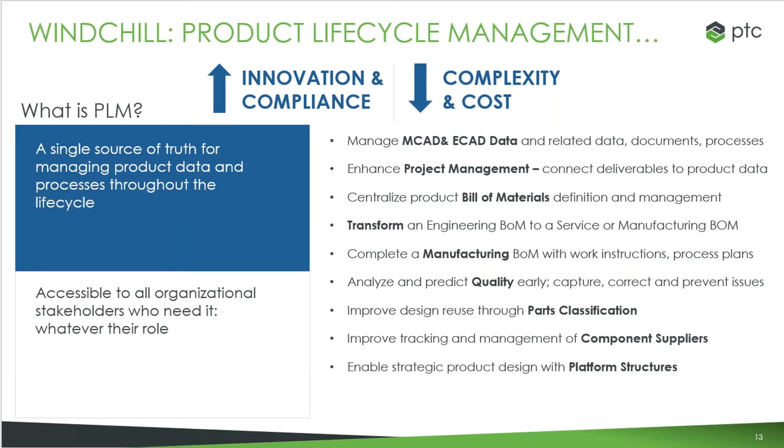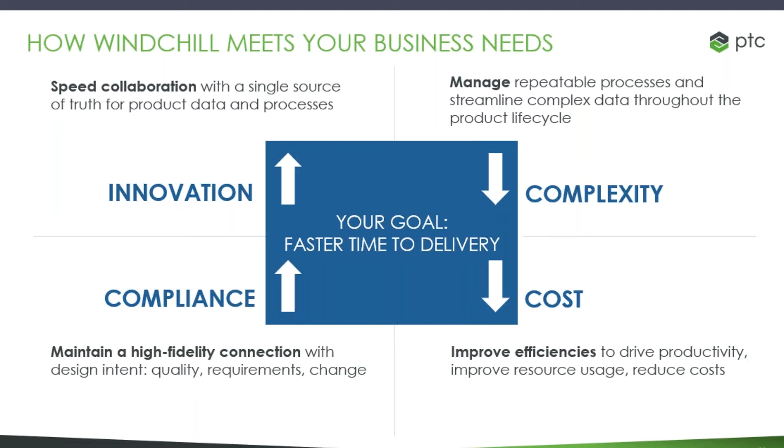Windchill is a single source of truth for product data and processes. It manages a repeatable process through the product lifecycle, maintains quality throughout the process, and drives productivity. So in this webinar, Cody will inform you of how SolidWorks can work with Windchill. It is all yours, Cody.

All right, thank you very much, and nice to be here with everyone. As mentioned, I'm going to be talking to you today about how PTC can help you work with SolidWorks data, whether that be from a CAD perspective or from a PLM perspective, and what we really offer there.

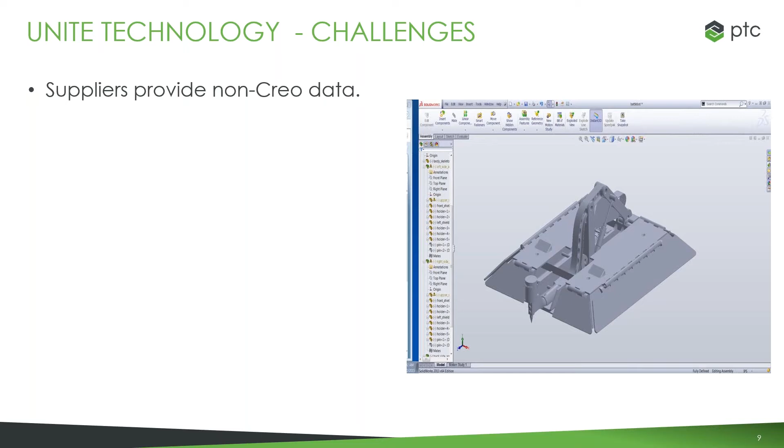Starting off from the CAD side, we have what's known as the Unite technology. The Unite technology is meant to help people, number one, by being able to give people non-Creo data. Sometimes suppliers provide non-Creo data and you need to be able to bring that in, and we want you to have ways to work with that.

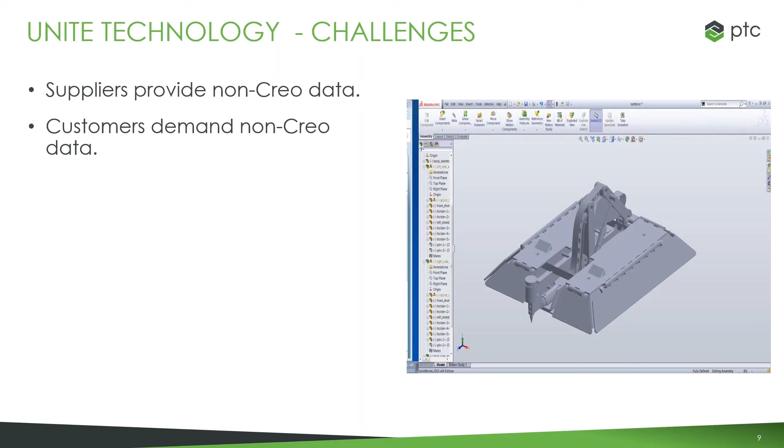On the other side, some customers need non-Creo data, and you need to be able to output in something that they can look at and be able to open and work with. As well as the fact that large corporations often have a hodgepodge of CAD and different tools to work with, and it can be difficult to go between those different tools. Traditionally, you can do outputs as neutral files and try to import things, but that does not always work perfectly.

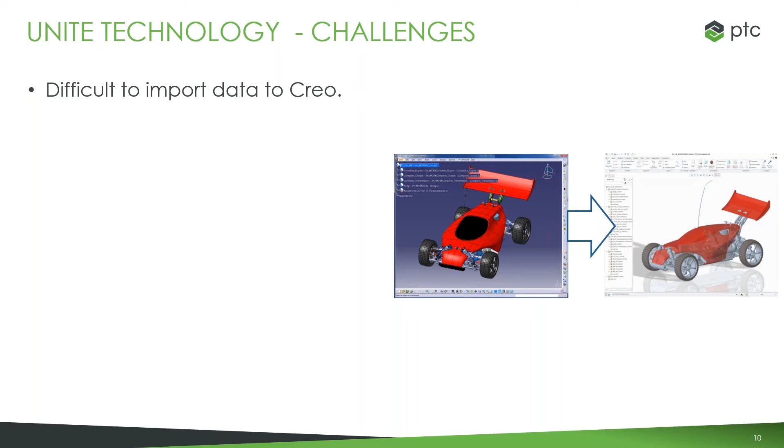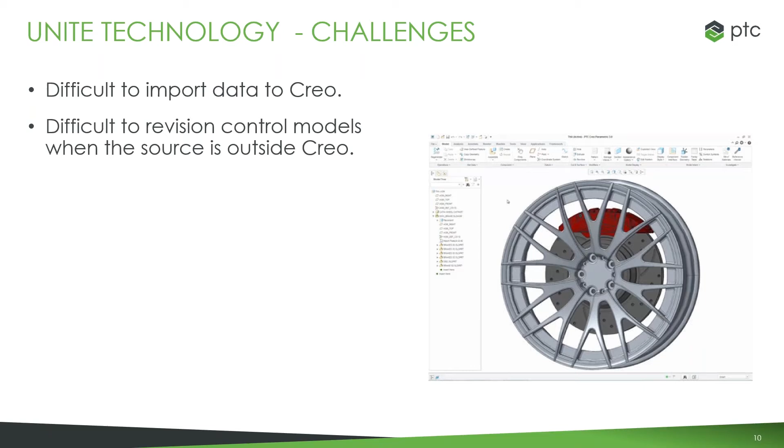There can be failures, or it can just be slow, especially if you're importing a large file. And then you have a difficult time keeping your revision controls on the model because it's outside of your tool and outside of your system. And there's also the costs associated with maintaining all of those different softwares and having people who are trained to use them.

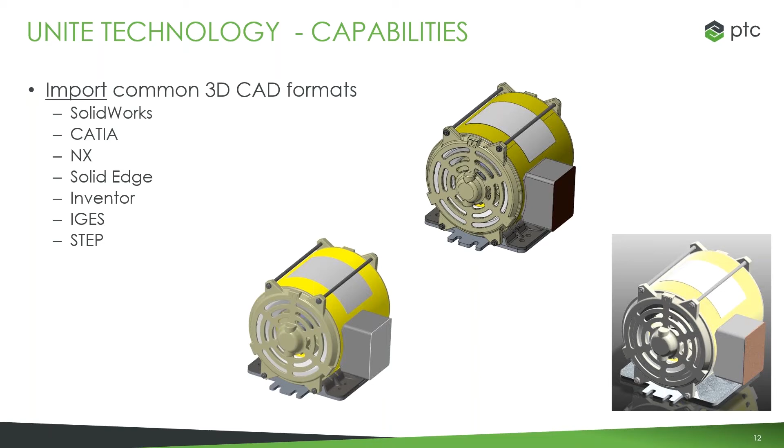So the solution that PTC came up with on the CAD side is the ability to consolidate and collaborate using Unite technology. Starting off, Unite gives you the ability to do the basic import functionality that you've always seen with Creo, but we're always working on it, always trying to improve it so there's less failures, a faster transition, and easier to use. But it also gives you the ability to open up directly SolidWorks, CATIA, NX, and from Creo 5 and onward, Inventor files.

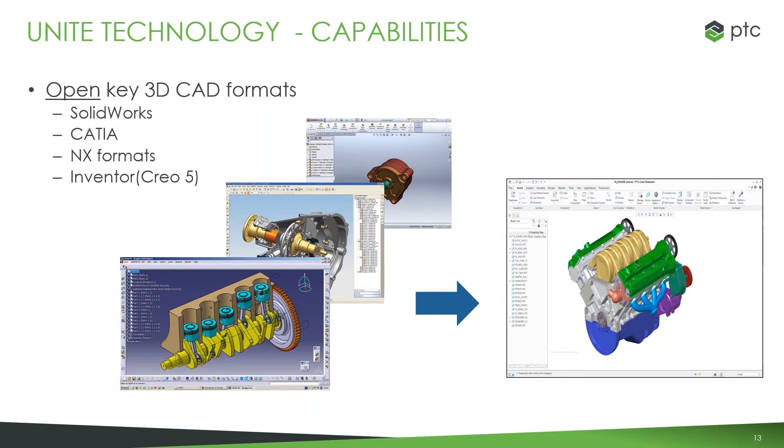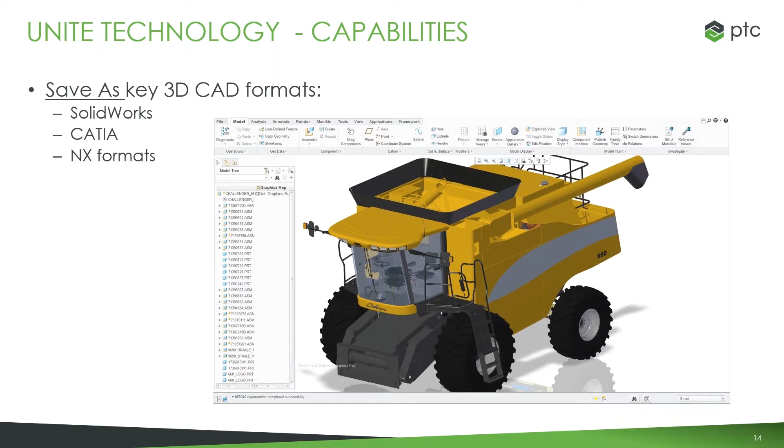So you can open those up natively without having to do any conversion. You can also, with the collaboration capabilities, save as those different extensions with SolidWorks, CATIA, NX, and give an output in one of those formats. The idea being that you can consolidate down on the tools that you need to use to work with these different file formats.

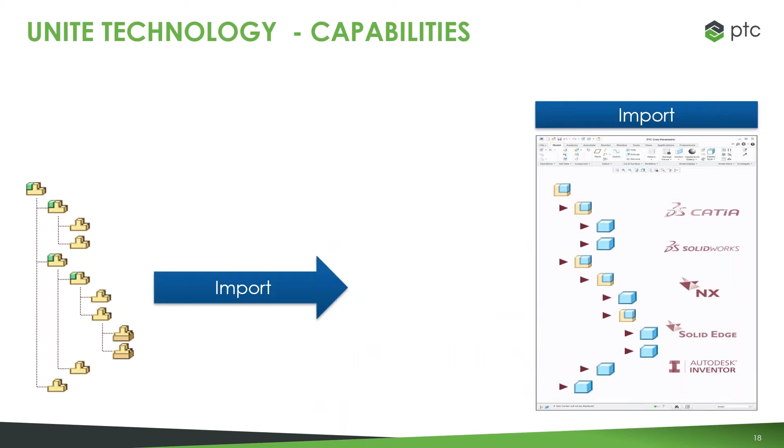On the consolidation side, this really starts with that import and open capability. The import is fairly traditional to what you might be used to seeing, where you're going to bring it in and it's going to convert it to that Creo file format. On the other side, if you choose to do an open, it's going to bring it in and just leave it as is. Now if you do want to make changes to a component, it is going to have to convert that individual component.

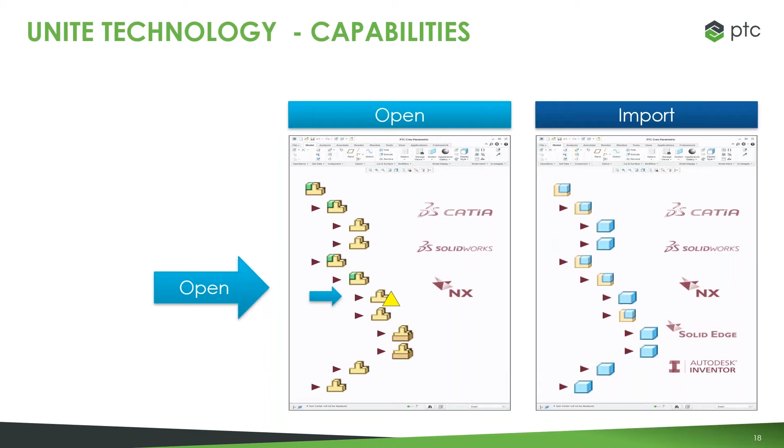But you can convert those on demand as you need to, so that you're not spending a lot of time converting the entire assembly for no reason, as well as helping to prevent any conversion failures by only converting the important components that you need to. So you'll see that when you start at a component, it will convert the assemblies around that, but other than that it will leave everything else in its native format, and you can have a mixed CAD bill there.

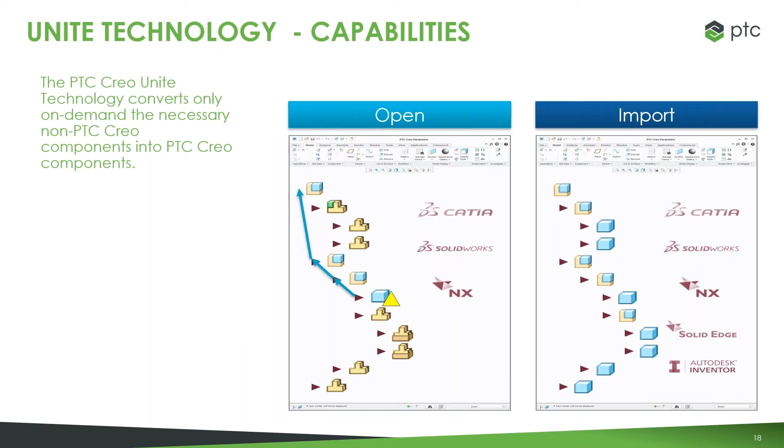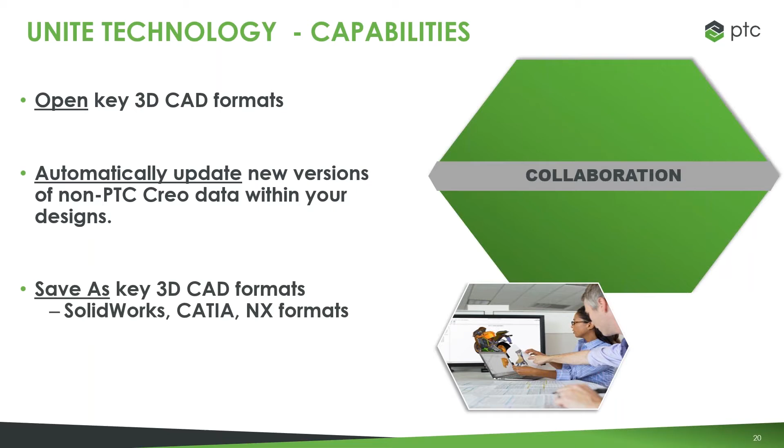On the other side with the collaboration, that's when we get into the ability to not only open those formats, but be able to push updates down whenever there is a new version, as well as save off in those different file formats. In the update, it's going to start out initially the same, where you're just going to put that open in, but you can use constraints to then be able to push updates.

So if there is a change, you can just push the new version of that SolidWorks or NX or CATIA file and have it automatically update in that same kind of constrained location that you put it inside of your assembly, without having to go through and reconstrain everything yourself by hand.

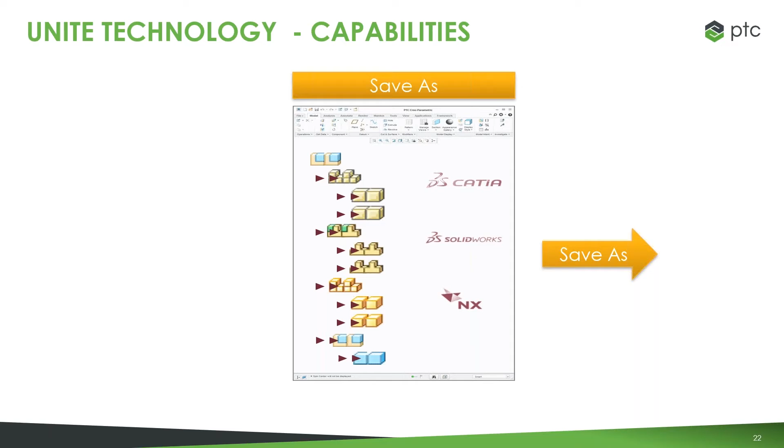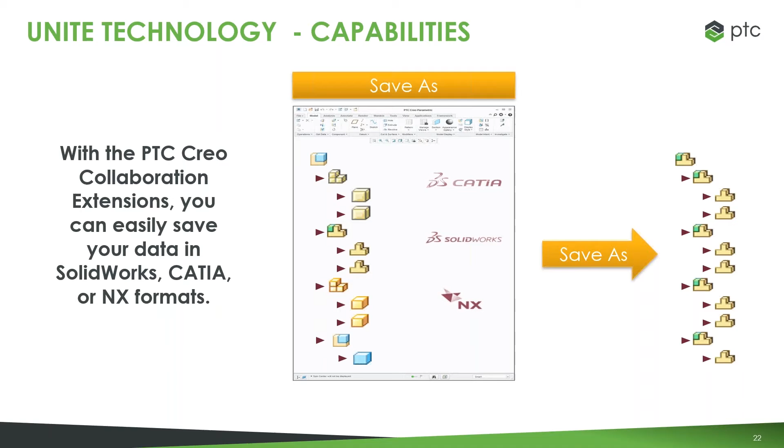On the save-as side, similar to the open-as, it's just going to allow you to take those formats and save off as whatever format you would like. And that does mean that you could open, for example, a CATIA file and save it as an NX file, or a SolidWorks file and save it as a CATIA file, or the Creo file to any of those as well. So a lot of flexibility there in being able to save off in those different formats.

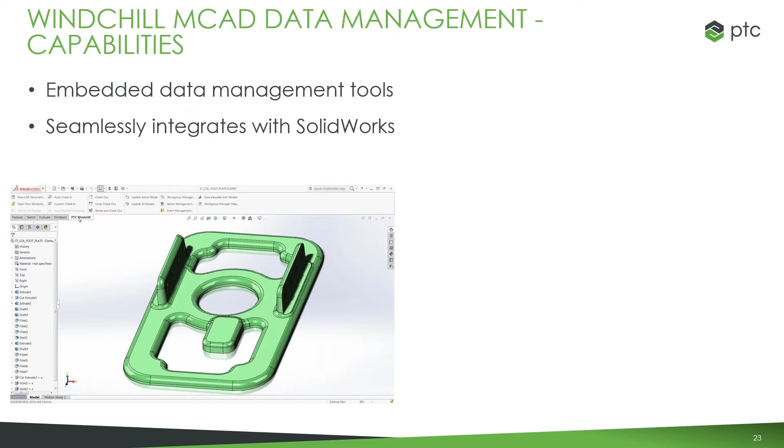Now, going past just CAD, on the PLM side we also have further capability to work with SolidWorks data. So Windchill is CAD agnostic and does give you the ability to use its functionality, whether you're using Creo or not. And it does embed directly into SolidWorks, giving you flexibility with how you would like to use that tool, and allows you to just do all of your normal functionality there, just like as if it were in Creo, being able to upload that information and manage all of it.

And you can do enterprise visualization with the SolidWorks data as well, and utilize all the functionality that you've come to use inside of Windchill for other types of data.

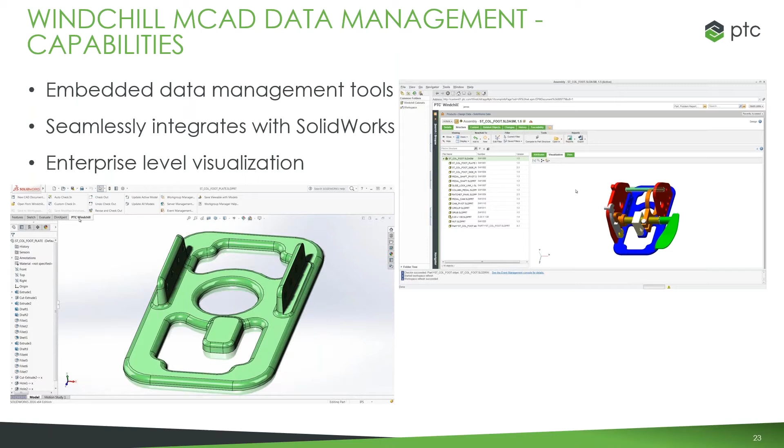So we'll go ahead and transition over to some demonstrations here, and we will start on the Unite side. Starting with Unite here.

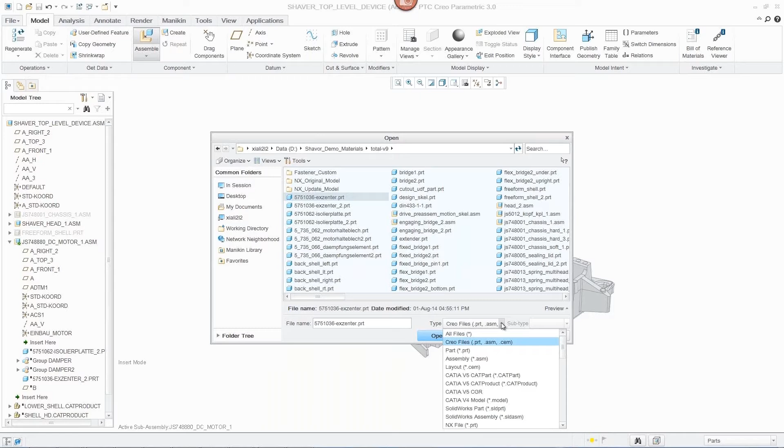If we were a company that made razors, but maybe we don't make the kind of motors for these, I might be bringing that in from someone else. So I could pick a file type, whether that be SolidWorks, NX, CATIA, Inventor, pick whichever file it is that I want, bring that in, and start using my constraints to place that inside of the model.

Now you could use a traditional constraint, or if you use the advanced assembly extension, you can also use some of the more advanced constraint capabilities, using things like copy geometry to recognize where those are going to be.

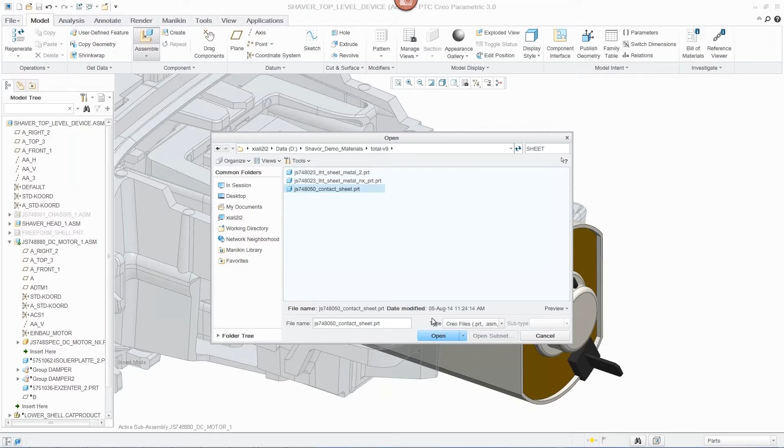But now that we have our outside part inside of here, we just want to start bringing in our Creo components and modeling it into this assembly. So you can see when we brought it in, we do not have to convert it there. It's still in that NX format for the motor, and it's going to stay that way unless we choose to make a change to it. So unless we actually need to make a physical change to the model, it's going to leave it as is.

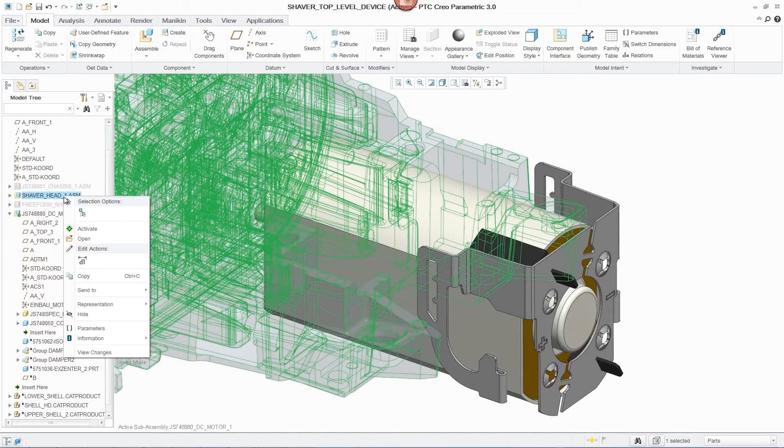And when you would go to check it into Windchill, Windchill can manage that as a multi-CAD assembly. Now, to that point as well, if you do need to make changes, you can, of course, use some of the functionality with flex modeling to be able to still work and make some easy edits to those parts. When you do bring those in, as you can see in our model tree here, it does not give you all of the features for those parts.

So just to be clear there, if you open up a SolidWorks part natively, because we do not use the same kernel to generate the geometry, we cannot give you the full feature tree, but we can give you the ability to recognize features using flexible modeling and still be able to make edits to those.

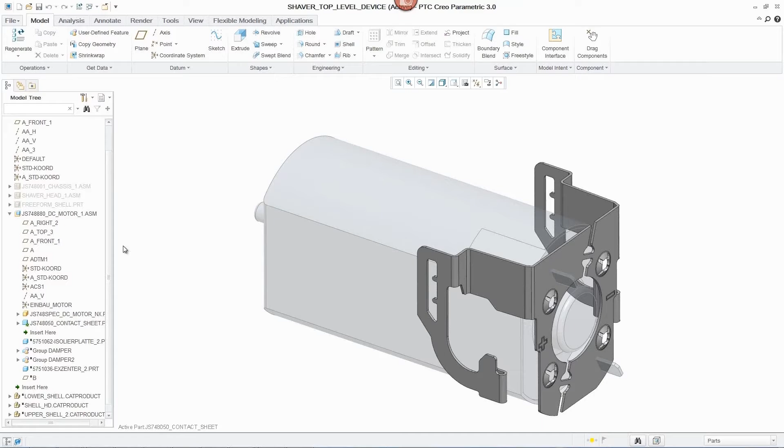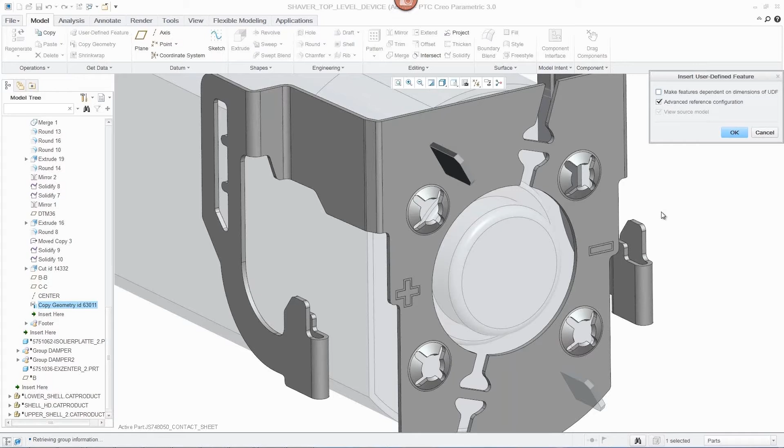In our case for now, looking at this sheet metal piece, we want to align this around those prongs and put some cuts in there for the back of the motor to come through. And to do that, we're going to, as I mentioned, utilize that copy geometry functionality. And then if there are any changes, it will be very easy for us to go downstream and push those updates. So we're just going to copy the geometry of the actual prong itself and then bring in a user-defined feature with a cutout that's going to align to that.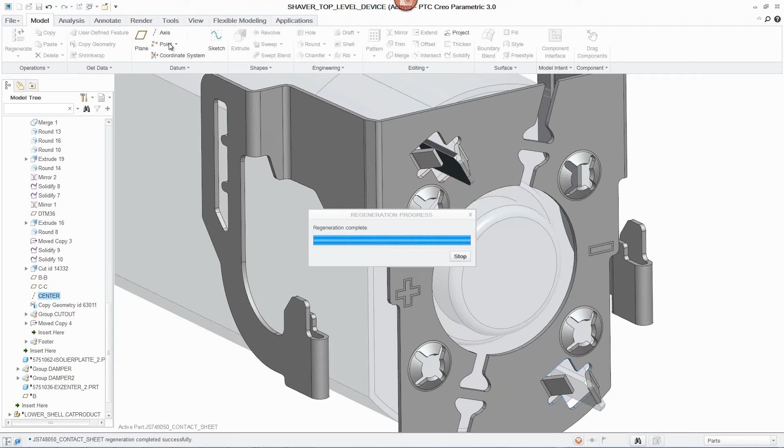Now, because we're using the copy geometry, and that copy geometry is from the non-Creo part, if that changes, it's going to recognize how it changed and where it moved so that it gives you more flexibility and easy updates around that. And of course, you can always use basic Creo functionality when working with these as well, to reflect that across there and have both update automatically.

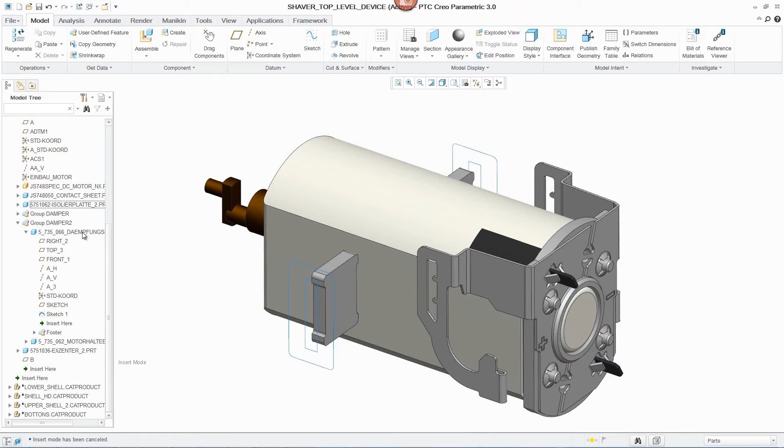Now, one last step here for the initial setup for this motor is that we want to set a body up along the casing for the outside of the motor and some bumper stops here. So again, we're just going to come in and work with this around this part in the same way that we would anything else. We're just going to start with the sketch and then recognize the geometry of the body so that if the motor body changes as well, when we build out our bumpers on the side, it's going to recognize where those walls are at and be able to update easily for us. So we'll go ahead and activate our sketch now and just do a simple extrude to build out that bumper.

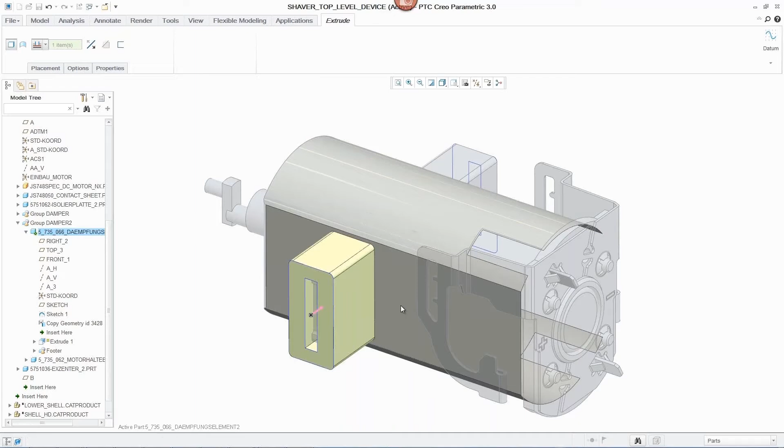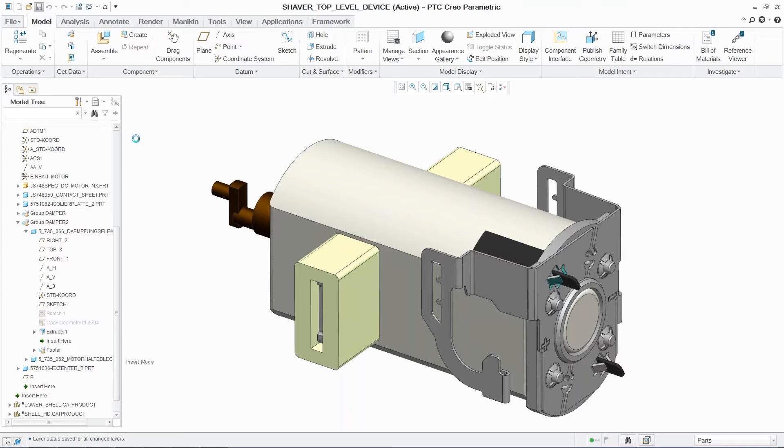And once we're happy with that, then we could send this off to whoever would be working on it next or do whatever the next step in that process is. In our case here, we're going to say that now maybe we are going to be receiving an updated version of this motor. So we're going to have to make some changes to that possibly and be able to work with those changes. But again, thanks to the Unite technology capabilities, as well as some of that copy geometry functionality, if there are any changes down the line, it's going to be easy for us to deal with.

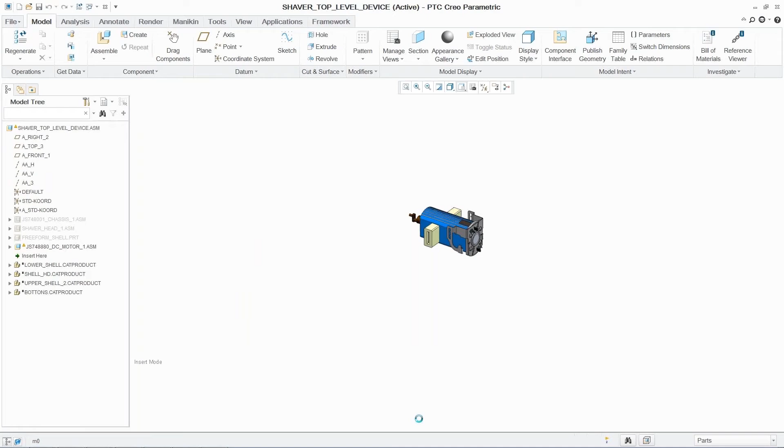And when it comes to managing that and making sure that we're going through the proper channels for things like changes and workflows on the Windchill side, it's going to be very easy for us to do that. So we're just going to bring back in that assembly and open it back up. And we now have it with a new motor. As you can see, we've got some outdated features and it is recognizing that from that copied geometry. So it recognizes that both the walls and the cuts are no longer in alignment with where we want.

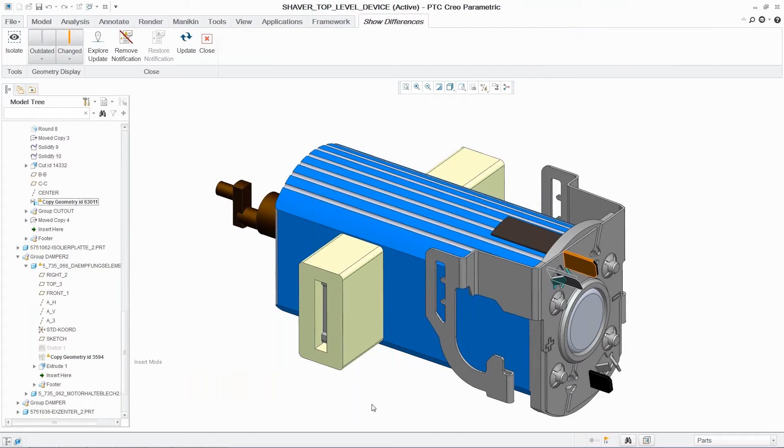And from that, we could easily choose to manually move some of those features if we would want, but we can also isolate that down using some of the copy geometry capability of advanced assembly, see what has changed, and then decide whether or not we want it to update to what that new version is. In our case, we say, yeah, we just want to move those cuts. So we'll say update. And just like that, we've got those moved over into their new locations.

But that's really the idea with Unite technology, is to be able to bring the components in that might not be native Creo files and utilize them in your assemblies and your designs anyway.

When it comes to making changes, again, you can use flexible modeling to be able to recognize some of those features and make fast and easy edits. And then you can utilize some of the update capabilities to push changes and make easy updates inside of there.

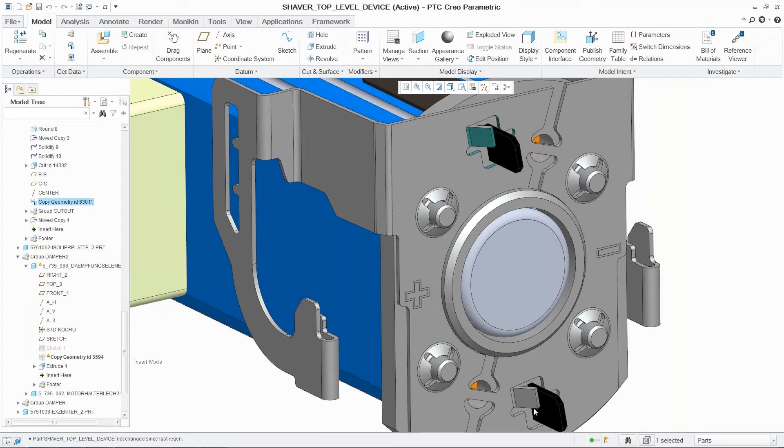Now, to the idea of being able to actually manage this data, you could, of course, check in a mixed assembly from Creo, but let's say you're not using Creo entirely, or you are using more than one CAD tool like SolidWorks. Well, Windchill will still work as a tool to be able to manage all of that.

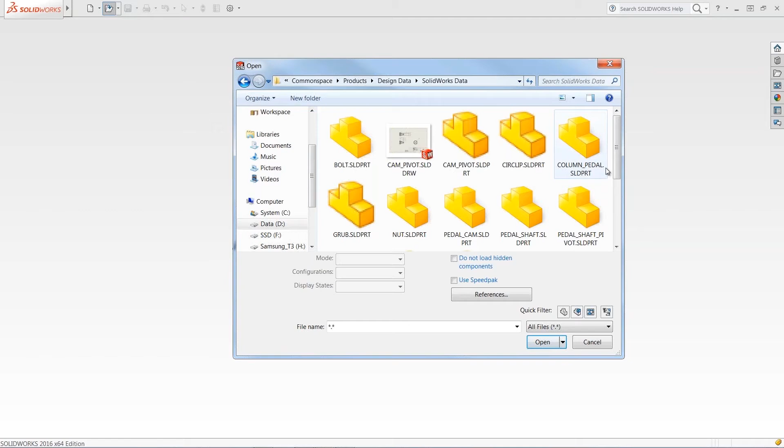If we come over here to actual SolidWorks now, we could instead say, all right, I'm going to be working with the SolidWorks part, but I'm just going to work with it in SolidWorks as opposed to Creo today. Well, I can still directly from here go into my Windchill environment, browse into my different contexts of information, find the folder with the object or the CAD piece in this case that I'm looking for, and directly from here be able to open that.

Now, once I've opened up a component here, you're going to see that we have a PTC Windchill tab. So this gives you the ability to do all the normal Windchill functionality that you would want, be able to check in, check out, have revision controls on that data. Make sure that only the people who are supposed to have access to it and be able to see it can see it. It's going to run all that functionality the same way as it would with any other component.

Now, when we do the checkout here, it's going to alert us to tell you, hey, this has successfully been checked out and you're good to start doing your work inside of the system. And because of that, we'll say, okay, we're going to go ahead for today and just change the size on this foot pad here.

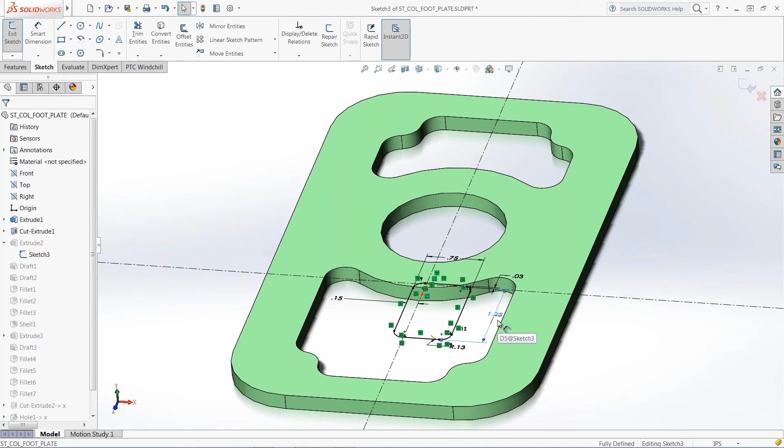And after we've changed the design a little bit and we like the new foot pad that we've placed on the foot plate, we might want to change the color as well, make it a little bit more noticeable for after we've checked it back in, some of the changes that we've made here. And it's going to bring in all of that detail just like it would for anything else.

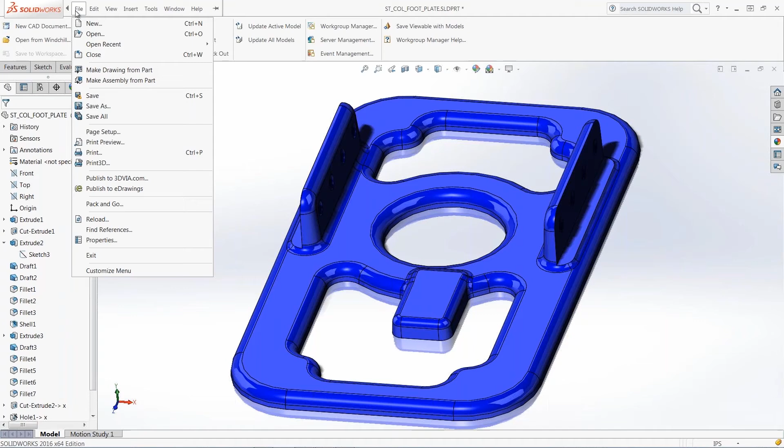It can also utilize any additional information that you might want to bring in. So if you had material components, for example, or any other attributes that you assign inside of SolidWorks, it can store and manage all of that inside of Windchill, just like it would for any other type of CAD. And I should note that this is true not just for SolidWorks, but for other CAD tools on the market as well. Windchill can work with them and bring this information like a description or the materials directly in and store those as attributes.

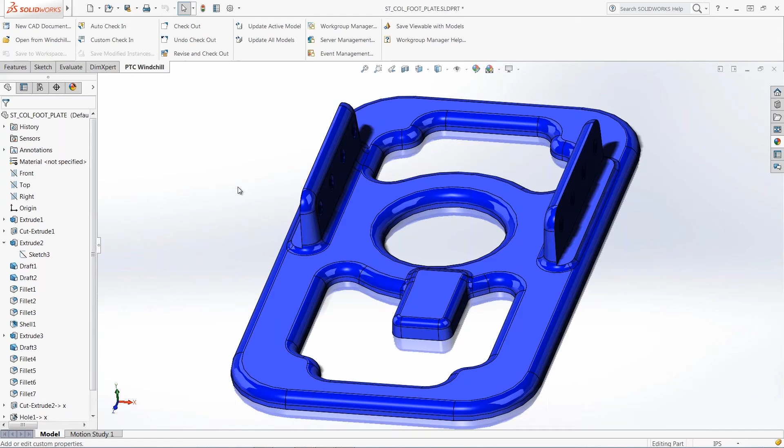Now that we have our attributes set and we like the changes that we've made to the component, we can go ahead and say, I want to check this in. It's going to launch the check-in wizard for us. We could bring in any additional components if we wanted. So just like in Creo, how you could associate a drawing inside of Windchill and manage that, with SolidWorks, you can also bring in any associated components, any associated material, and check that all in.

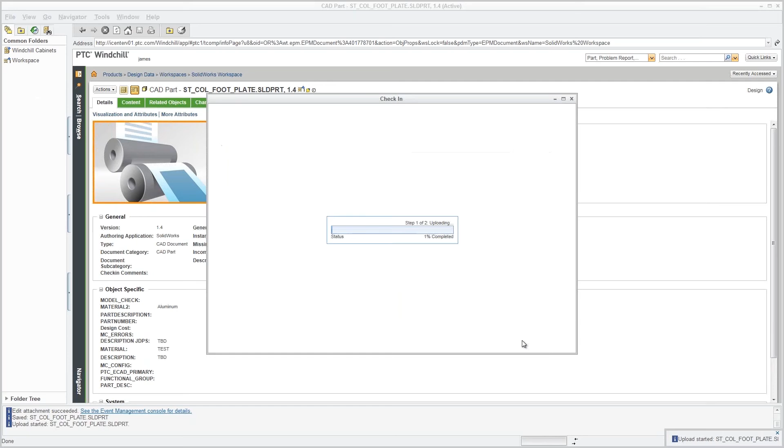Now, when we check this in, we're going to get, again, those messages alerting us whether or not this has been successful and if there's been any problems. And now inside of this system, we would be able to go through and take a look at those updates that we were going for. So if we look at the foot plate here, we can see that we have this blue foot plate in our case due to that update.

And we also have it set to have this neutral file format here as an attachment. And any of those details that we would have created, so any additional comments that we would have put in, the material you can see is set to aluminum, and all of that is searchable inside of the system and easily manageable.

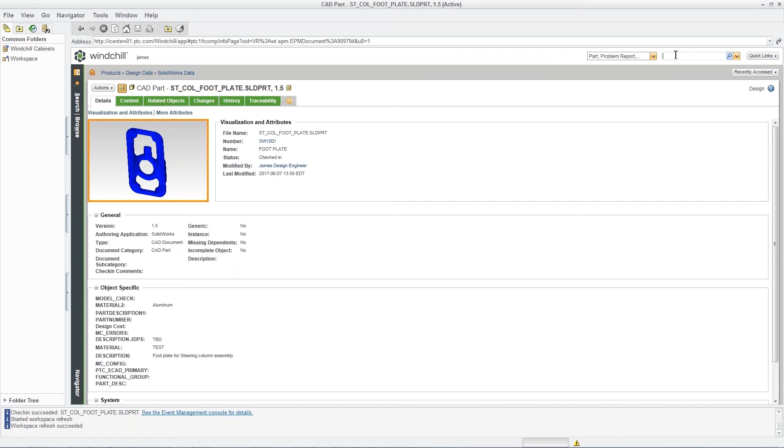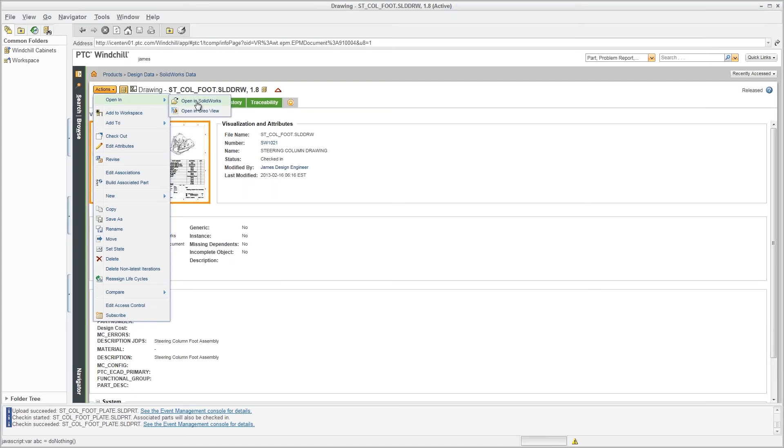Now, the relationship between Windchill and SolidWorks also allows you to push information back in the other direction as well. So for example, if we had a drawing, we can have that drawing related to the actual CAD object and be able to bring those up, as well as be able to push those through maybe a workflow together so that you can see their relationship. But we can also push information and attributes from Windchill down into SolidWorks.

You could have a SolidWorks BOM, an NX BOM, some other capabilities there, and manage it inside of a system that's going to give you full iteration and version control and bill of materials management, along with a lot of extended capability for other functionality that you might want in terms of product lifecycle management.

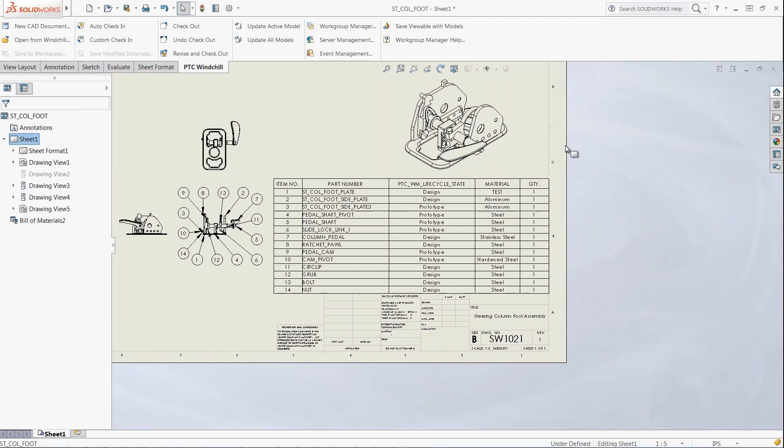So just to touch on a little bit of what all we saw today. What this can really do for you is, number one, allow you to, if you would like, stop relying on third-party solutions, be able to directly bring those files into Creo or into Windchill and manage them and work with them. Reduce IT costs by being able to simplify down that training and the number of tools that you have to manage, as well as be able to help streamline product development processes and increase engineering efficiency on both sides

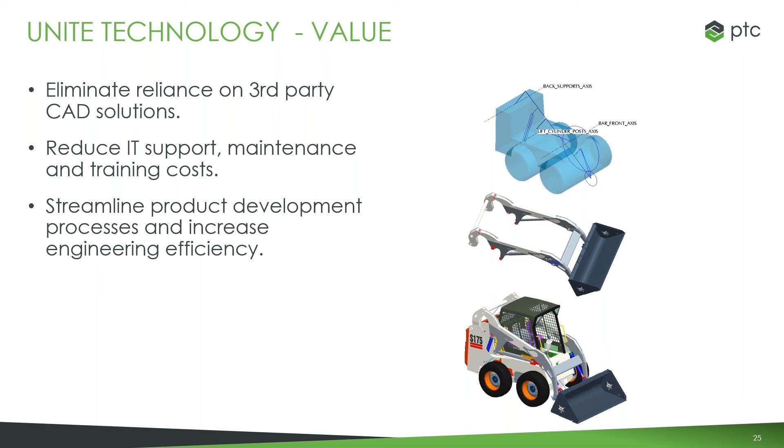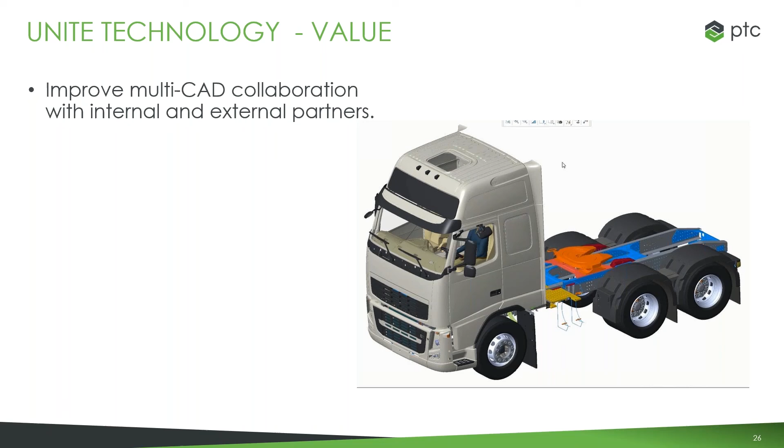by being able to have all of that data stored in one place and giving you the ability to flexibly work with that data between different tools in the CAD side. Ultimately leading to multi-CAD collaboration, either internally or externally, and the ability to stop spending so much time doing translations or recreations of that data because it's in a format that you're not used to working with or that you can't manage or whatever it would be.

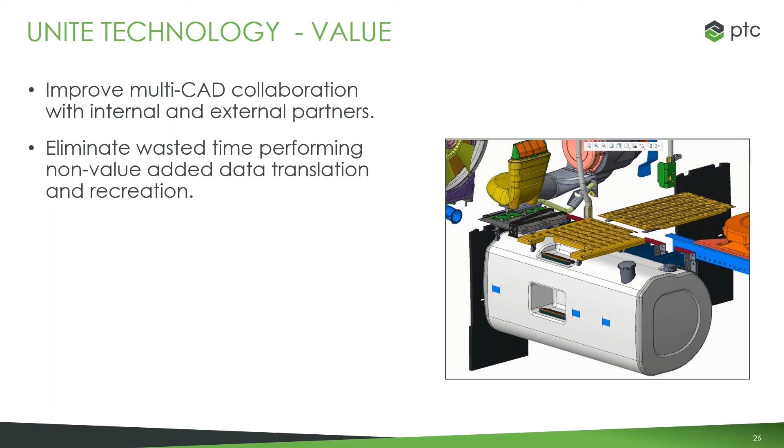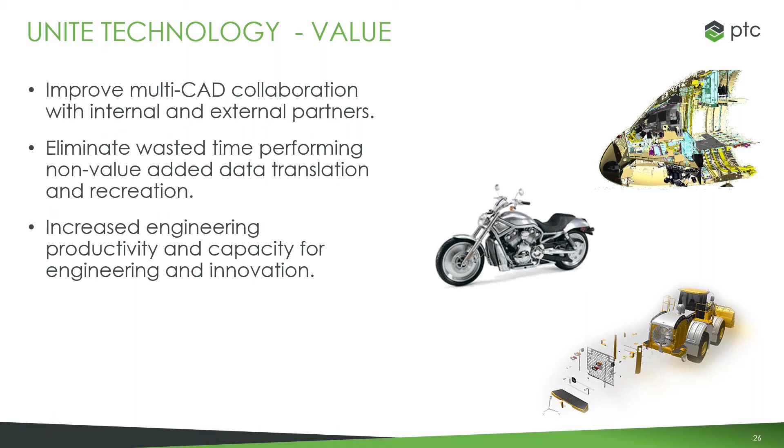And lastly, then have increased engineering productivity because your engineers are going to be spending more time really doing design work as opposed to focusing on going back and slowly pushing in updates, reconstraining in an updated version from a vendor or a supplier, and focus on what they should be doing. So I'll stop here and see if there's any questions in the room.

Thanks, Cody. We actually have a couple questions. The first one being from Bethany Runyon, and her question is, can Windchill automatically make representations and other outputs/associations with SolidWorks files? Yes, the visualization capabilities are still the same as it would be for other CAD types. You can have it automatically set up to create representations whenever you would check in the object, so it could create that visualization, as well as in the example I showed, we had a neutral file.

So you could set up publishers to automatically publish both associative parts, or I should say associative files, and those visualizations, or you could choose to manually do it depending on what your workflow would be and what's most useful for your team. Great, thank you. The next question is coming from Alex McNabb, and their question is, when you output in a different file type from Creo, does it keep the feature tree?

So much like whenever you open as the SolidWorks or the NX or the CATIA, because of the kernel differences, the output is not going to be able to give them the full feature tree whenever they open it up in the other tool. What that's really allowing you to do is when you share that with whoever it is you're sending it to, you're making sure that they're not going to have any problems opening it, that they're not going to have any conversion failures, and that they don't have to spend the time converting it. So while they're not going to get that full feature tree, it is still going to make it much more accessible for them and easier for them to see and use.